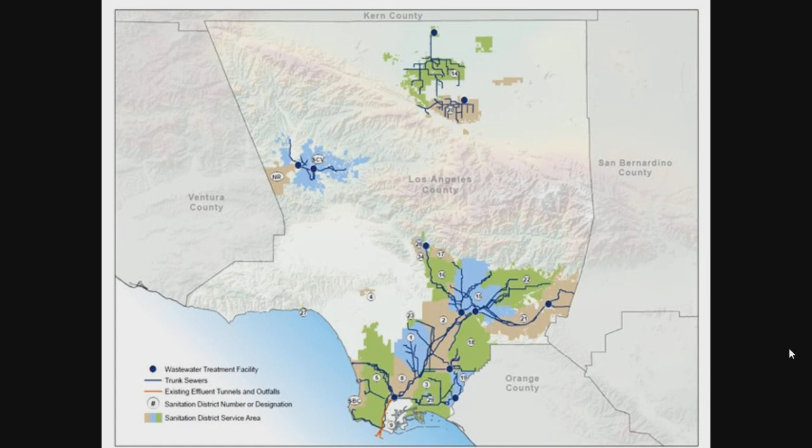The sanitation districts are 24 independent special districts serving about 5.6 million people, covering approximately 850 square miles, made up of 78 cities and unincorporated areas of Los Angeles County. The sanitation districts construct, operate, and maintain wastewater treatment facilities, operate and maintain collection systems, and are responsible for disposal and transfer of collected solid waste. An integral part of our mission is to convert wastes into resources. To this end, we recover recyclable materials, including recycled water, and produce green energy.

Now for the star of the show, let me introduce you to Tulare Lake Compost, or TLC, the sanitation district's only fully owned and operated biosolids management solution. TLC is located in the Central Valley of California, about 200 miles northwest of Los Angeles. It took over 10 years to permit, design, and construct. The facility is designed to be constructed in phases, utilizing state-of-the-art technology. Permitted at full capacity for 500,000 wet tons per year of biosolids, it is currently built to a capacity of 100,000 wet tons per year. And it has been in operation since January of 2016.

In this presentation, we will discuss the unique opportunity and vision at TLC, as well as the challenges and research efforts that have brought the facility to where it is today, and how we developed a system that meets our throughput goals and compliance with environmental regulations.

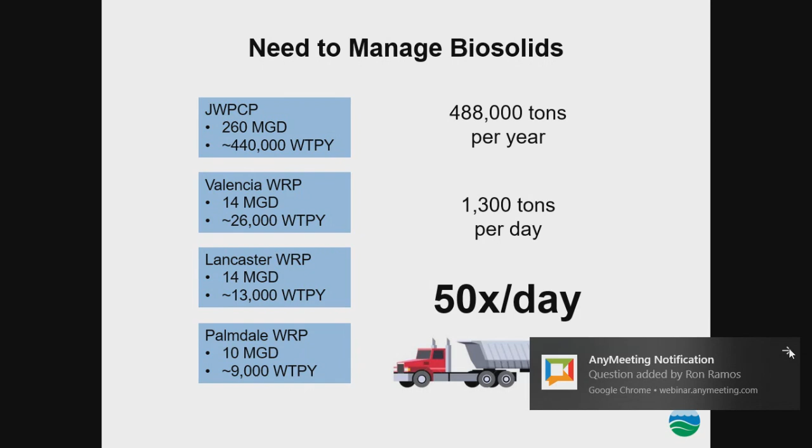As I'm sure most of you are aware, one of the byproducts of wastewater management is biosolids, which happens to be the most difficult to deal with. 4 of the sanitation district's wastewater facilities produce biosolids: the Joint Water Pollution Control Plant, or Joint Plant, and the Valencia, Lancaster, and Palmdale water reclamation plants, in total producing approximately 488,000 wet tons per year of biosolids. This represents over 1,300 tons per day, over 50 trucks per day, every day, and this material has to go somewhere. In the 1990s, the sanitation district's biosolids management consisted of composting and landfilling.

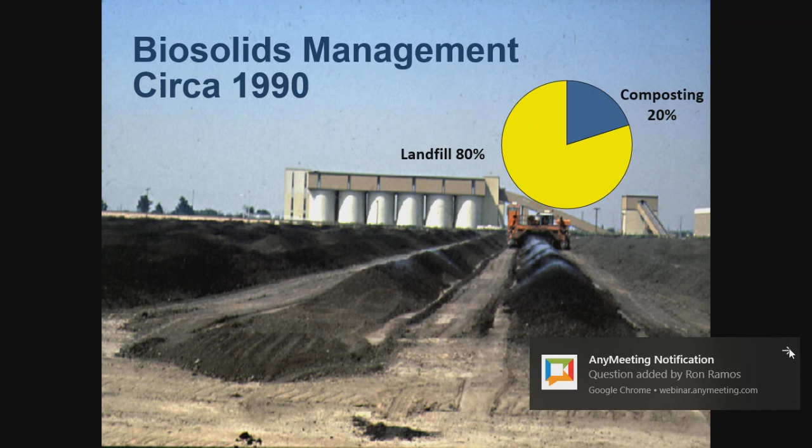20% of the joint plant's production was composted on site. The remaining 80% was landfilled. That landfill was the Puente Hills landfill, also owned and operated by the sanitation districts. Unfortunately, odors from on-site composting eventually led the districts to cease these operations. In the early 2000s, biosolids management options started to dwindle. Due to the closure of the Puente Hills landfill, the end of the on-site composting operations at the joint plant, and land application bans throughout the state.

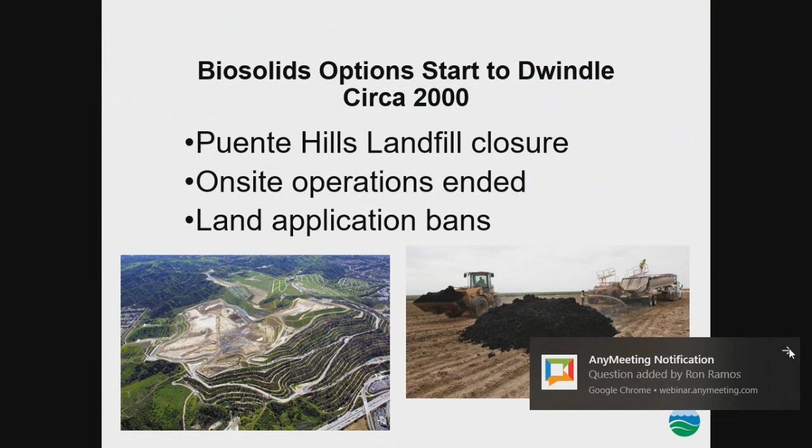The districts needed a solution. The solution had to be reliable. While the districts continue to utilize a number of third-party biosolids management options, to increase reliability we wanted an option that was fully owned and operated by the districts, sized to handle the district's full biosolids production, and environmentally responsible to turn this waste into a valuable resource.

When considering locations for composting, California's Central Valley seemed to be a very good fit. There was lots of available land, and it's one of the largest agricultural regions in the country. There was an abundance of wood waste and a huge demand for fertilizers and soil amendments.

Bear with me. There we go.

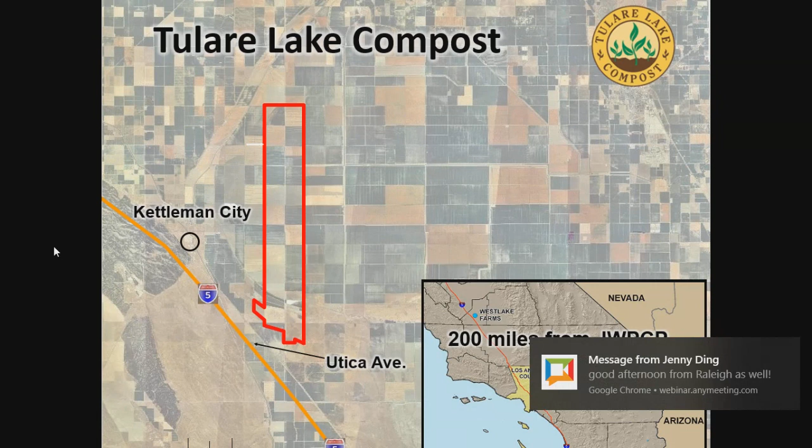In 2001, the districts entered into an agreement to purchase 14,500 acres from Kings County landowner Westlake Farms Incorporated. A small portion of the property was set aside to develop a state-of-the-art composting facility. Compost produced by this facility would be used on the remaining agricultural land by the former owner, now tenant, through a lease agreement. The remaining adjacent land is sufficient to handle all compost produced by the facility at full permitted capacity. So here's the vision for TLC.

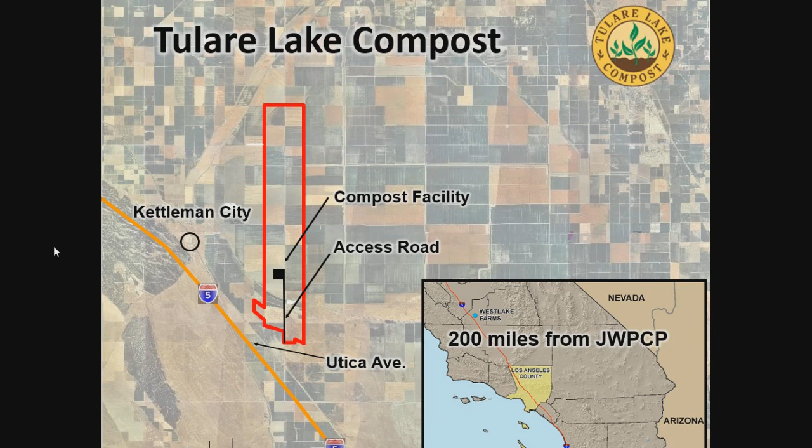Take the highly treated biosolids from the joint plant, blend with the abundant local agricultural wastes, and produce EPA Class A EQ compost to be applied directly to the land owned by the districts.

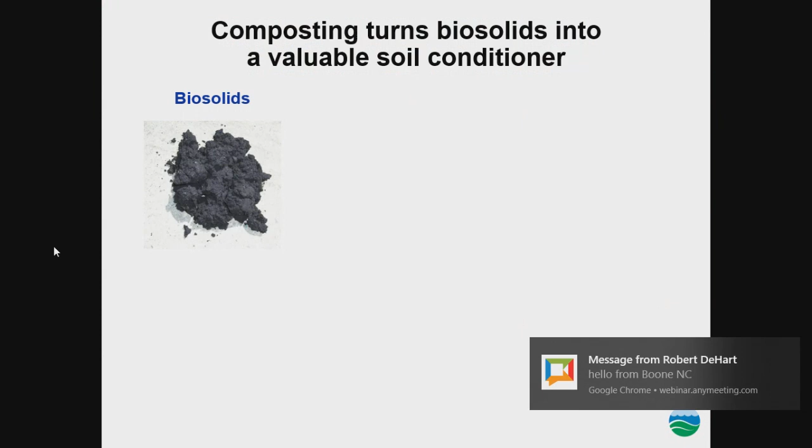So what is this Class A EQ compost? Biosolids coming off the wastewater treatment process are stabilized and reduced in volume through digestion, then dried to about 29% solids.

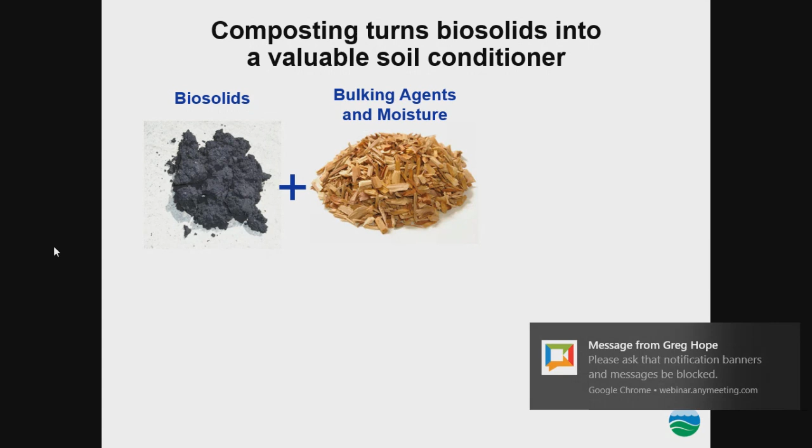These biosolids are mixed with green waste or agricultural wood waste containing the necessary carbon and water. Under aerobic conditions, microorganisms break down this organic matter and give off heat. Heat action over time destroys pathogens, producing compost.

More wastewater agencies are turning to composting as a means of biosolids management. It's environmentally friendly since it improves soil health, increases crop yield, reduces irrigation needs by reducing evaporation, and reduces dependency on chemical fertilizers. In addition, it mitigates climate change due to carbon sequestration by actually putting carbon back into the earth. It also contributes to the state of California's goal of organics diversion from landfills.

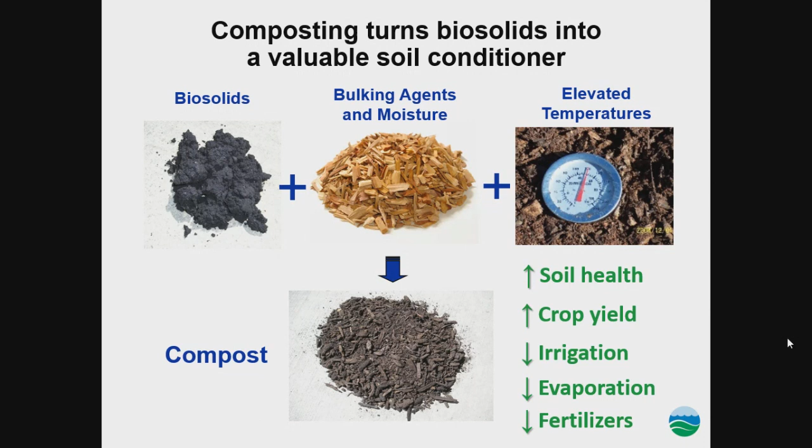The EPA defines Class A EQ compost as follows: biosolids that have been treated beyond what normally occurs at the treatment plant level, including two numeric criteria. The biosolids must have been treated by a process to further reduce pathogens, or PFRP. The purpose of this criteria is to ensure that pathogens such as bacteria and virus are killed off to make the material safe to handle. To meet the PFRP criteria, the compost has to be kept at a temperature of at least 131 degrees Fahrenheit for at least 3 days to ensure the heat kills off the pathogens.

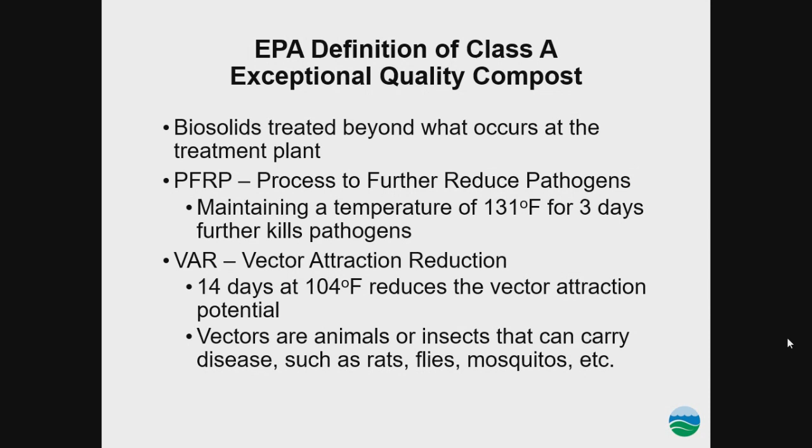The biosolids also have to be treated by a process to ensure vector attraction reduction, or VAR. The purpose of this process is to reduce the attraction to the compost by animals or insects that can carry disease, such as rats, flies, and mosquitoes. To meet the VAR criteria, the compost has to be maintained at a temperature of at least 104 degrees Fahrenheit for at least 14 days.

While we encountered a number of challenges in bringing TLC online, the biggest has been related to air emissions. So at this time, Brian Polson is going to give us some insight to the air quality challenges at TLC.

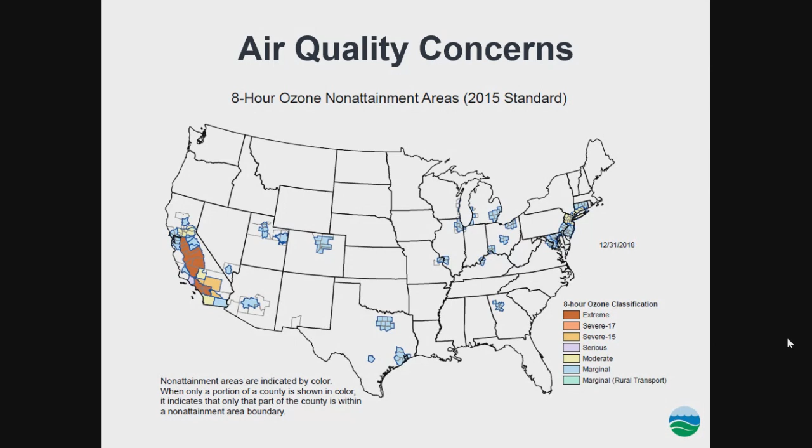Thank you, Carl. So I'll start off by providing a short background on air quality and why it's a challenge to TLC. This map shows the areas with the worst air pollution in the country. The two areas which are classified as extreme non-attainment zones for ozone are colored in red and are both located in California. And TLC is right in the middle of one of them.

What this means is that the local air district has to closely regulate emissions, which results in hundreds of regulations that we have to follow. And this relates to composting because composting generates emissions.

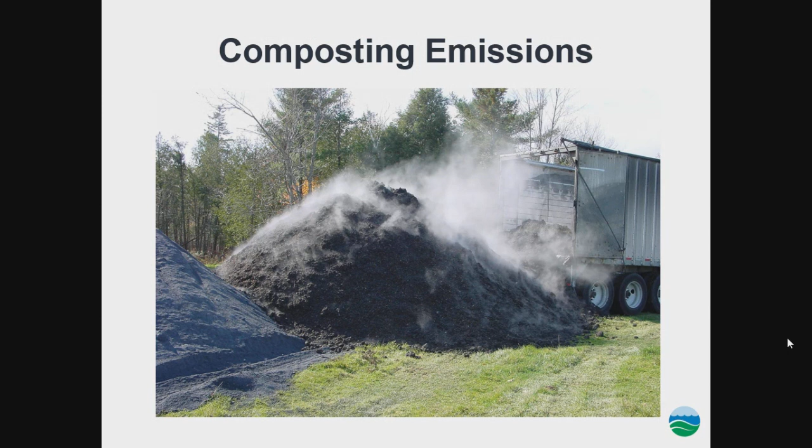This is a picture of an uncovered and active composting pile, and you can see the steam coming off the top, which brings along pollutants with it. The two main emission compounds that we'll be talking about in this presentation are volatile organic compounds, otherwise known as VOCs, and ammonia emissions, which are both generated from the composting process.

Now, because the facility is in a non-attainment zone, the local air district, which is the San Joaquin Valley Air Pollution Control District, has to establish a limit on how much emissions we can generate per year. And this ultimately determines the amount of biosolids that facility can process. Before I go into how we are maintaining compliance, we need to take a look at the composting process.

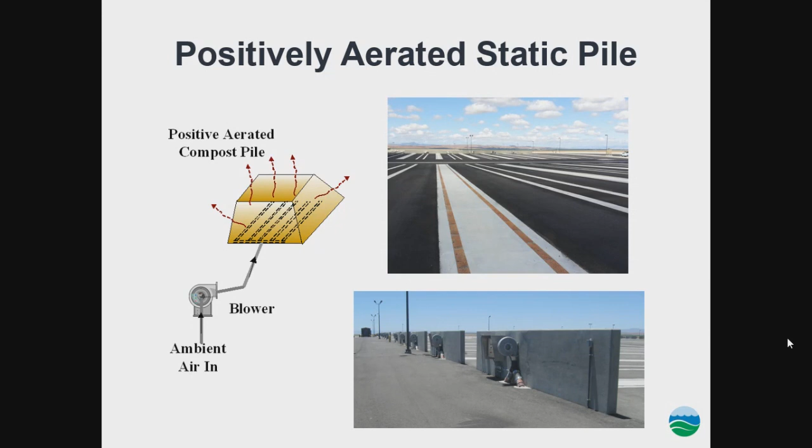Composting is an aerobic activity. At TLC, we operate positively aerated static piles. Once the biosolids are mixed with agricultural waste, the material is placed on top of underground aeration headers, which are connected to blowers. These blowers draw in ambient air and push it through the compost pile to provide the compost with oxygen.

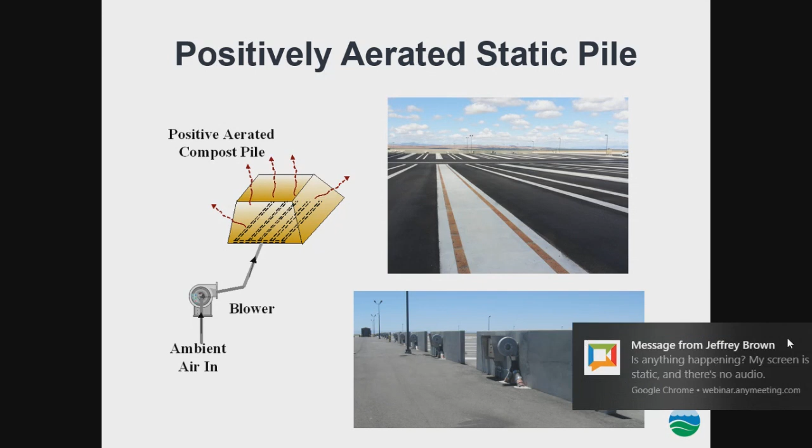Now, emissions from within the pile would be pushed out through the surface, so we need a method on how to capture and reduce these emissions before they reach the atmosphere. The way we achieve this is using the synthetic fabric cover system, which is the technology used at TLC today. These covers are made of the same material as the thermal jackets you can find at outdoor equipment stores, and they work in the same fashion.

This system uses the fabric covers which are laid over the windrow compost pile being constructed. The fabric is breathable and provides moisture retention, but it prevents outside water from coming in. It also acts as a thermal insulator to maintain heat within the pile to keep the material composting. Now, these covers actually control emissions.

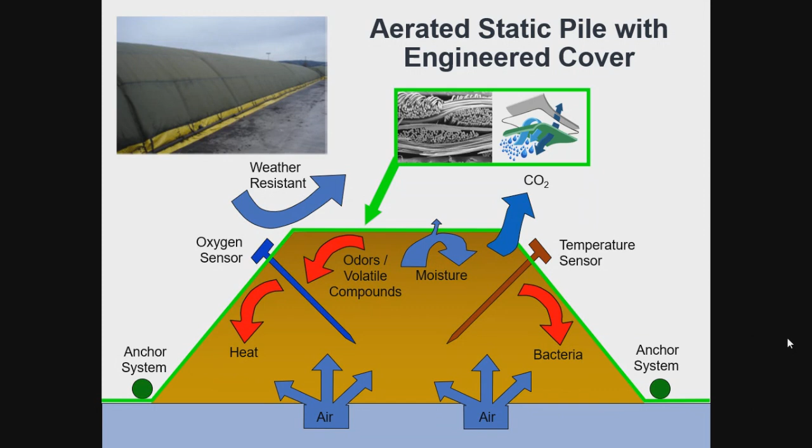This diagram shows a cross-section of a covered windrow pile and what's happening underneath. As the steam from the compost mix rises up and hits the cover, it condenses and forms a moist biofilm layer on the underside, and this is the main control device. So as VOC and ammonia try to escape through the cover, the biofilm layer captures them and returns them back into the compost pile to be further degraded.

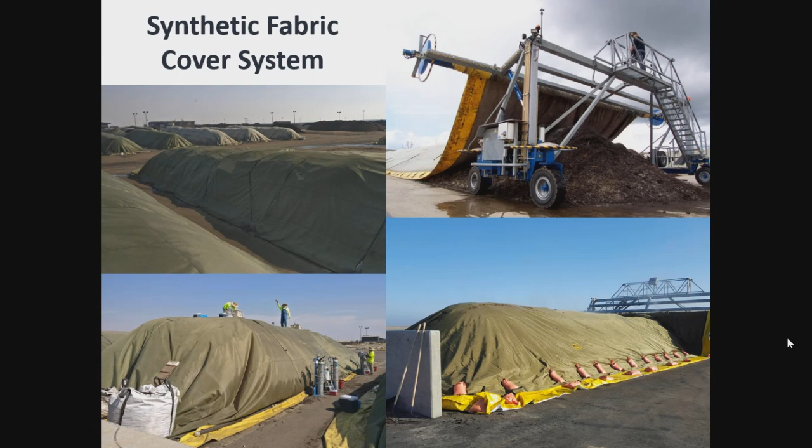The system is also a three-phase composting process, which calls for turning up the piles in between phases. This involves removing the covers, moving their material around to fluff it up, and covering the pile back up again.

Now, during the facility design, we wanted to ensure that the fabric covered technology would actually perform in controlling emissions. So back in 2007, we conducted a pilot study at the Cedar Grove composting facility located in Seattle, Washington, which was already using the fabric covers.

We trucked over biosolids from the joint plant and agricultural waste from the Central Valley to construct test piles, and we sampled the emissions coming off at the top of the cover surfaces. We did tests for both VOCs and ammonia emissions, but I'll mainly focus on VOCs for this portion, since these are the emissions that are the limiting factor for throughput.

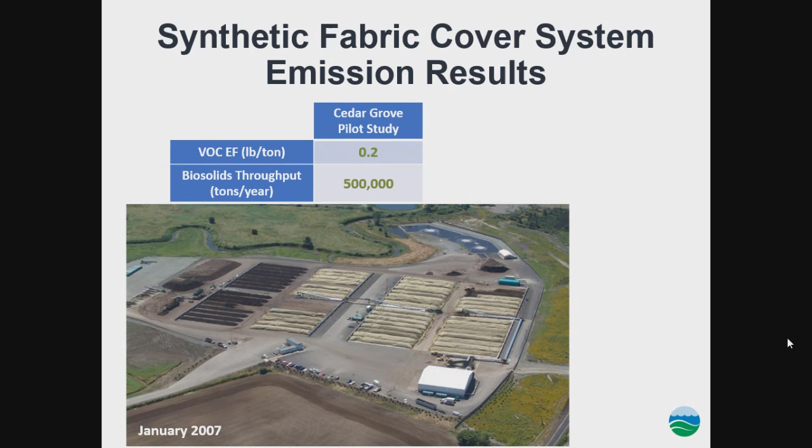From the pilot study, we obtained a VOC emission factor of 0.2 pounds per ton of compost mix. And with our facility's emissions cap, this provided us a biosolids throughput of 500,000 tons per year. This throughput level is important because it allows us to process all the biosolids produced by our wastewater plants that Carl mentioned beforehand. Now we move into 2016, which is when the facility began operation.

As part of our permit requirements, we needed to conduct a compliance test to determine what emission factor we would achieve at TLC. That number came out to 2.6 pounds per ton, which significantly lowered our throughput to 39,000 tons per year. This caught us by surprise as the number is more than 10 times higher than what we observed in the pilot study.

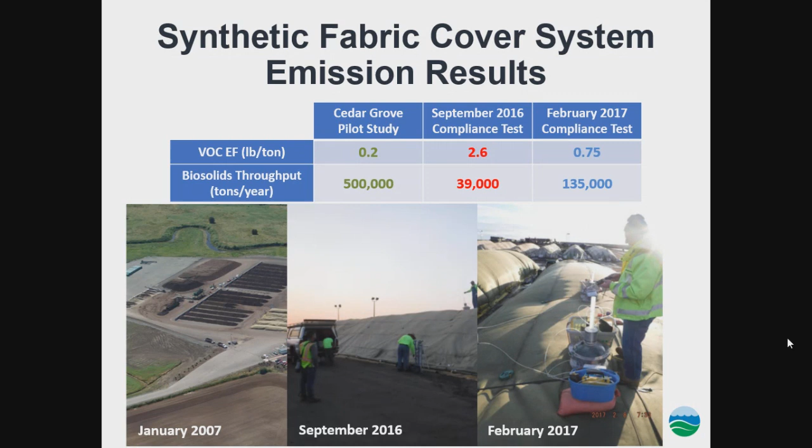To verify if these results would be consistent, we had another test performed as soon as we could in February of 2017. During this compliance test, we achieved a lower VOC emission factor of 0.75 pounds per ton, with a throughput of 135,000 tons per year. But this is still a far cry from what we've seen before in the pilot work. So what caused the difference between the results we saw at Cedar Grove and what we were achieving at TLC?

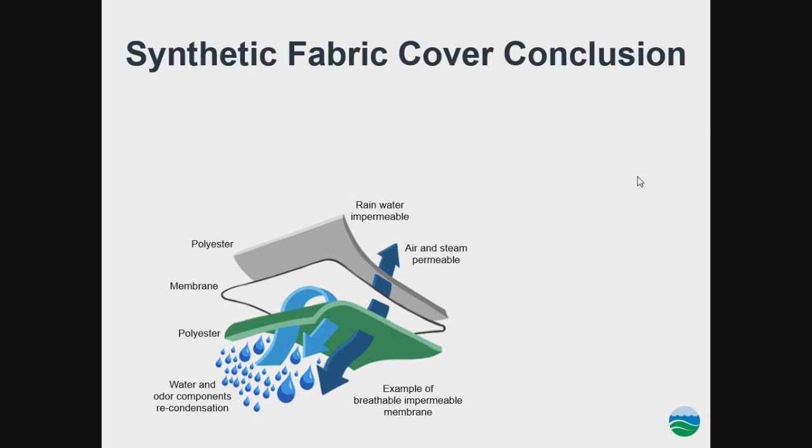Another look at how the fabric covers control emissions. The covers rely on that moist biofilm layer developing underneath the cover. However, the Central Valley experiences high temperatures during the summertime, where it will frequently reach above 110 degrees Fahrenheit. And when this happens, the surface of the covers can easily hit 140 degrees.

What we've seen is that when the moisture inside hits the covers, it'll flash right through and won't condense. This means that the control layer doesn't form, and some of the emissions are allowed to pass through the cover.

This helps explain why the Cedar Grove pilot study had much lower emissions, since it was done in the dead of winter, where they had trouble even getting solids out of the truck because they were frozen to the walls. With those cold conditions, the moisture had no trouble condensing on the cover and forming that control layer.

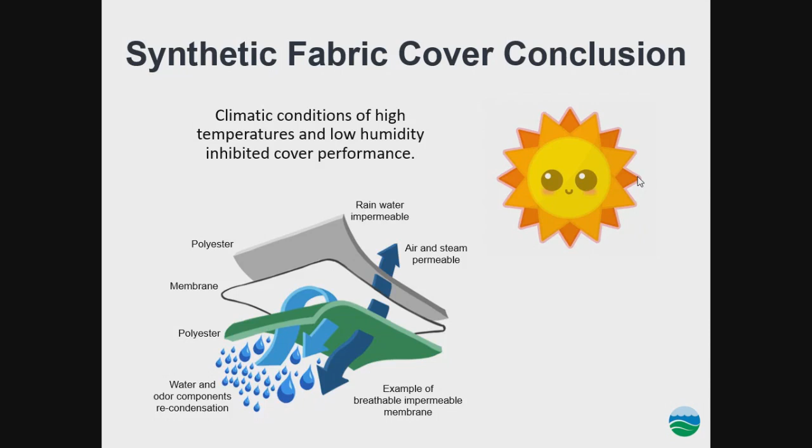Now that we've narrowed down why our emissions at TLC were higher, we need to find a solution to meet our goals of lower emissions and higher throughput. The fabric cover technology didn't provide the emission reductions needed for our facility during the hot, dry summers, so we decided to look at other options.

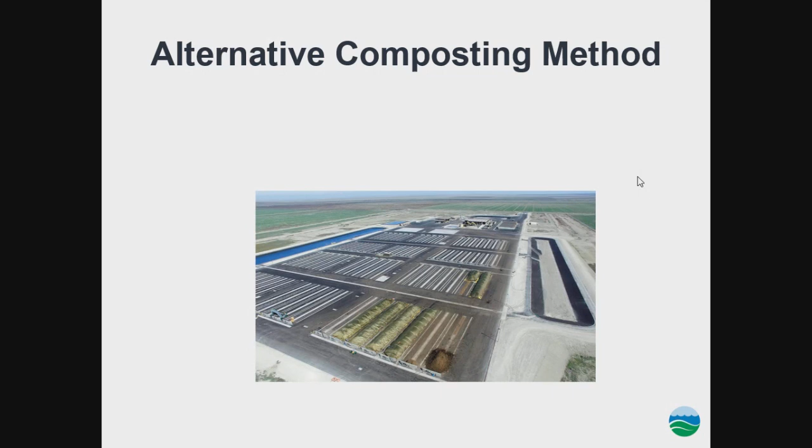Based on our discussion with the testing company, we knew that there were other composting facilities achieving low emissions during the hotter seasons. This eventually led us to an alternative technology: the extended aerated static pile with a finished compost biofilter. We'll refer to it as an eASP for the rest of the presentation.

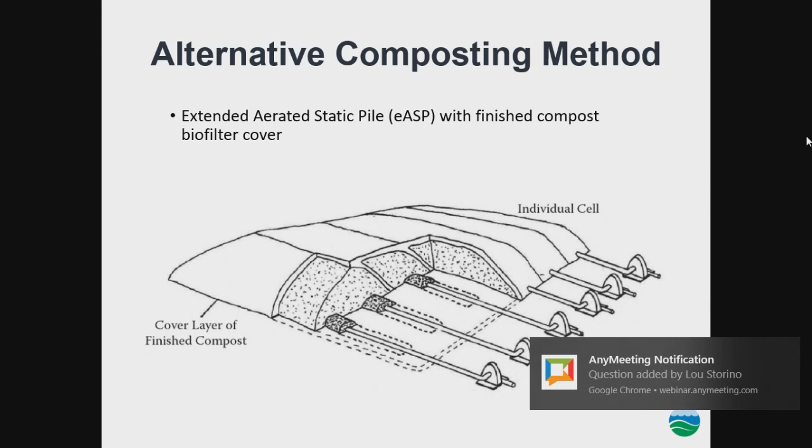It's similar to the fabric cover system where the compost pile is aerated from underneath, and there is a cover on top for emission control. The difference is that instead of a fabric cover, a layer of finished compost is placed on top. This finished compost layer acts as a biofilter, as emissions from the compost rise up through it. The microbes degrade the VOCs and ammonia emissions before they can escape the pile.

The compost piles can be built side by side, and while it's not shown in this picture, there are sprinklers on top of the pile to provide irrigation, to maintain the moist cover and a good environment for the microorganisms.

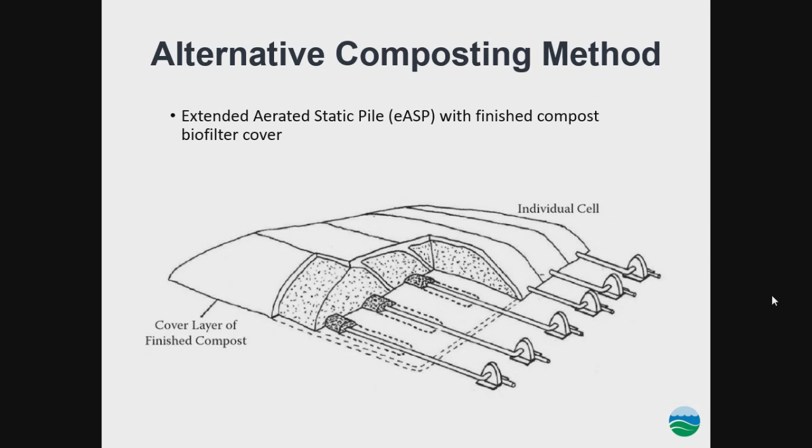Now, these are some of the potential benefits that really pushed us to explore the eASP option further. Based on compliance test data from other facilities using this technology, we saw that they were achieving low VOC and ammonia emissions, and those eASP tests were conducted in the summertime, when we were having the most difficulties.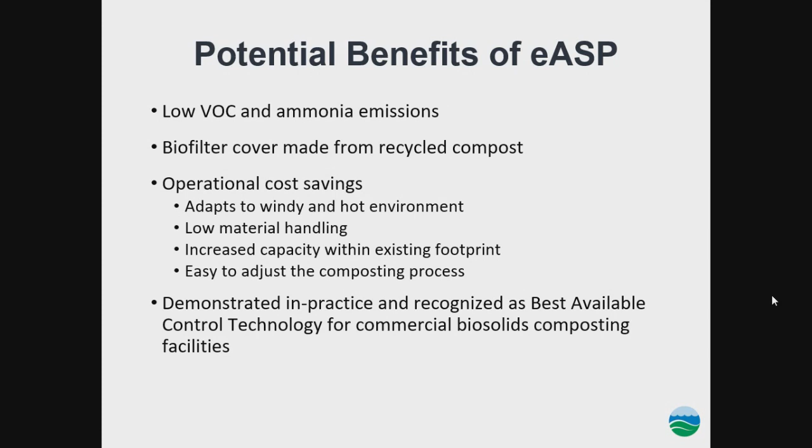However, one of the conditions was that we were required to conduct a compliance test within 9 months after the permit was issued. This is a tall task, especially for something we had never operated before. So I'll pass it back to Carl to explain how our operations team achieved this.

Thank you, Brian. Now I'm going to talk about the actual construction of the EASPs at TLC. TLC is laid out with a series of 12 pads, each with multiple windrows or piles.

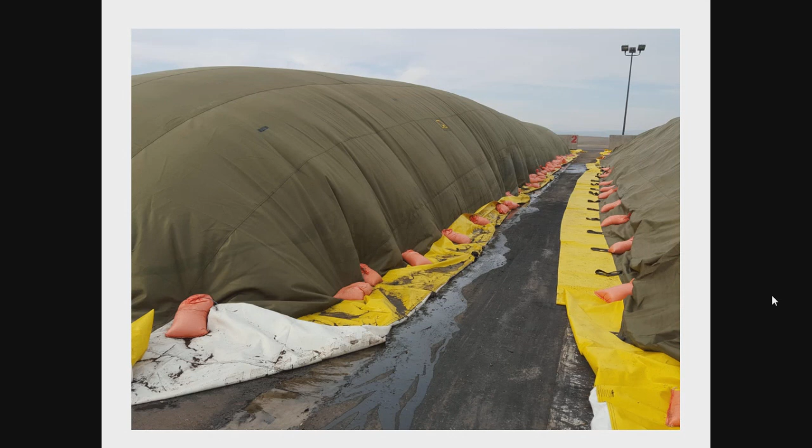Each fabric-covered pile is 26 feet wide by 155 feet long, with an 8-foot aisle between each pile. A typical pad is approximately 155 feet long by 230 feet wide and consists of 7 piles with 7 blowers supplying air to underground aeration trenches.

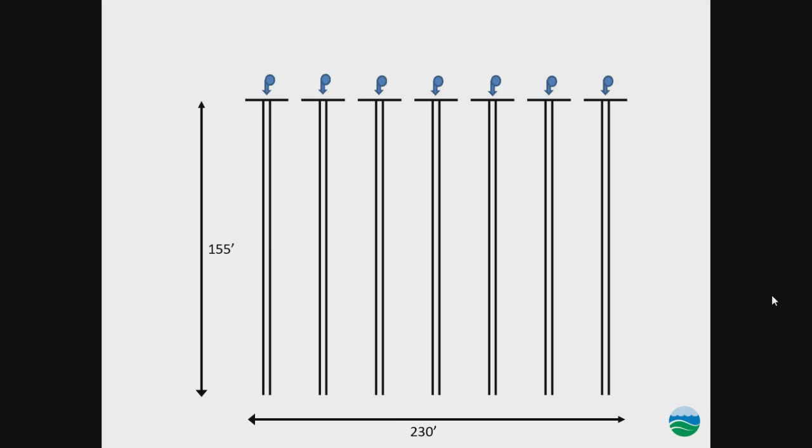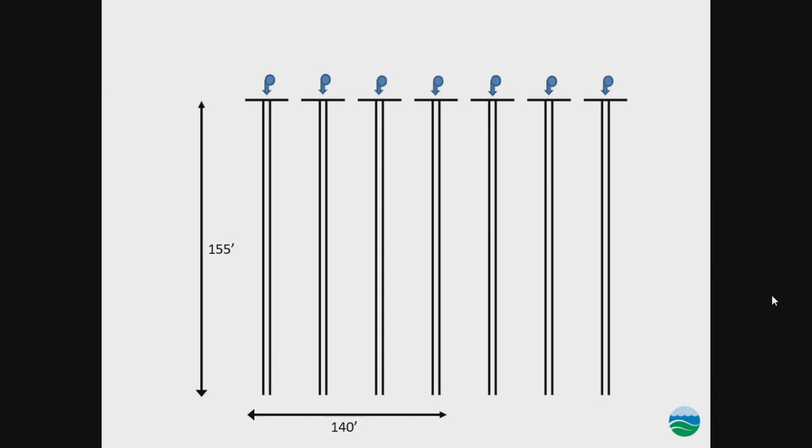The first EASP would be 155 feet long by 140 feet wide, built on the footprint of just 4 piles. We added 3 rows of above-ground perforated PVC piping between these 4 piles.

We rerouted the blower output from 3 adjacent piles to these above-ground headers to provide aeration to the aisles in between. Compost mixture was then placed on the footprint shown here over the course of several days.

This was the maximum size EASP if we were to use both below and above ground aeration. The resulting EASP has 7 distinct zones: 4 piles plus the 3 aisles in between.

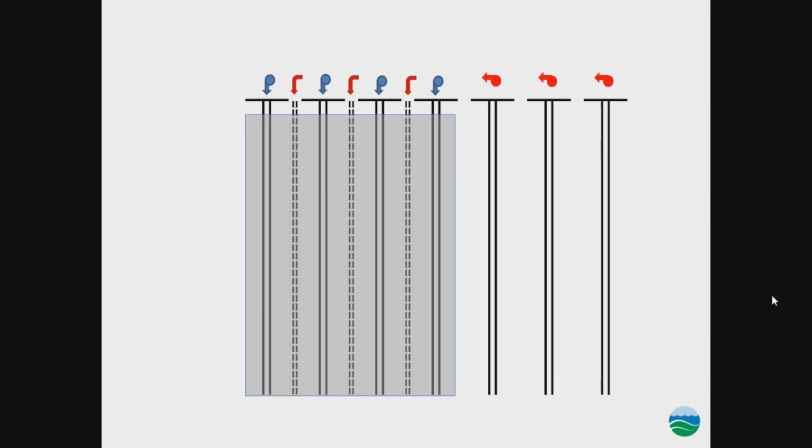A custom-designed PLC monitored temperature and oxygen in 21 locations at 4 depths. The PLC individually controlled aeration using all 7 existing blowers.

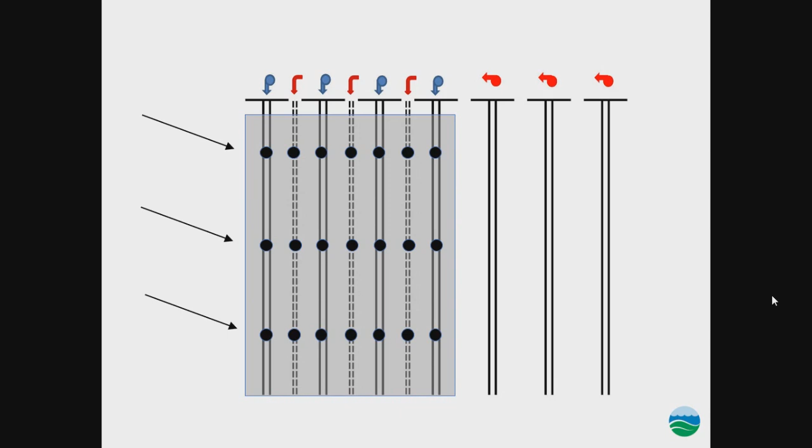The irrigation control system was later upgraded to a cloud-based system, controlled by mobile phone, to facilitate remote and after-hours control of the irrigation system. This flexibility was important so we could react to biofilter temperatures to maintain compliance.

We upgraded the original proprietary wired temperature and oxygen probes to wireless temperature probes, and subsequently eliminated the oxygen probes. The wireless probes communicate directly to the PLC, simplifying data collection and trending.

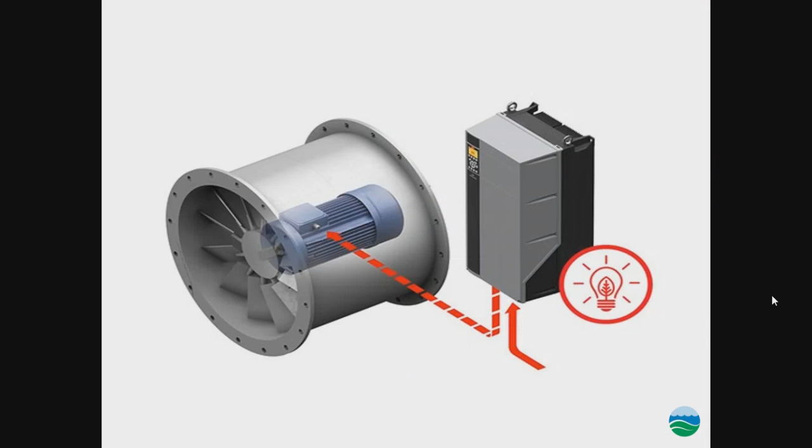We added variable speed drives to each blower to provide the flexibility to adjust the airflow to achieve PFRP, the process to further reduce pathogens faster, and to reduce emissions over the life of the EASP.

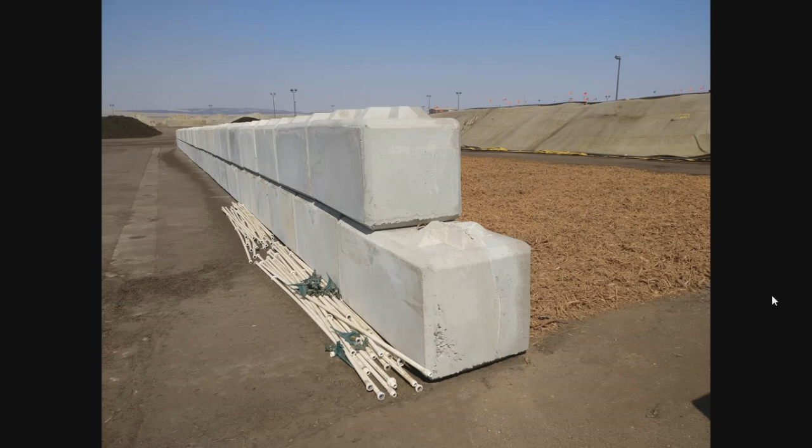Since higher airflow translates to higher mass emissions, it is advantageous to turn the blower speed down as soon as possible. Concrete block walls, similar in style to Legos, were added to the sides of the EASPs to mitigate uncontrolled aeration.

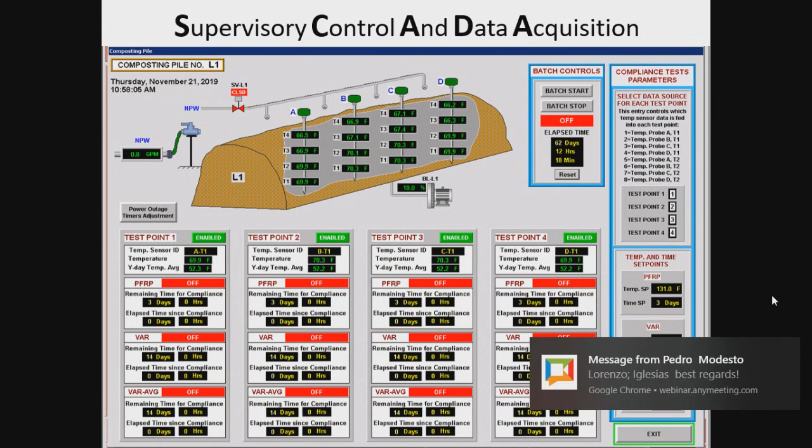Ultimately, the PLC was integrated into the TLC Supervisory Control and Data Acquisition System, or SCADA, which further improved our data monitoring capabilities and standardized the collection and trending of operational parameters.

The SCADA integration was a huge improvement in our ability to see what was going on, even remotely, and react to it in a timely manner.

On the top half of this screenshot, you can see the individual probes of one pile with temperature sensors at multiple depths, the irrigation control valve, and the blower speed control. The lower half of the screenshot shows the status of PFRP and VAR for each monitored point.

The SCADA system monitors each point individually, calculating time to compliance, showing red for points not yet in compliance, and green for points that have achieved compliance.

Over the next several months, we built 11 more EASPs incorporating these improvements, keeping in mind our looming deadline to prove compliance with the air regulations.

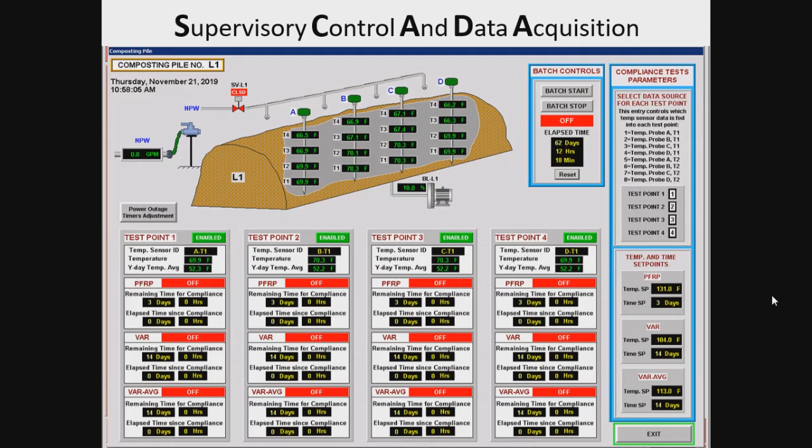At this time, Larry Wong is going to discuss the many phases of research and results and explain how these modifications to the facility will protect our full permitted capacity. Thank you, Carl.

So the research and results presented today are broken up into 3 phases. EASPs 1 through 4 are the early trial and error phase. We had 6 months to get things working before demonstrating that it worked.

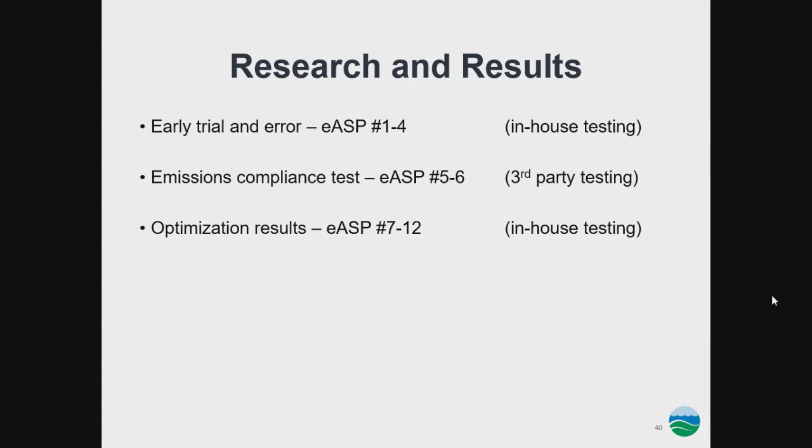EASPs 5 and 6 is the official test to prove air quality compliance to regulators. EASPs 7 through 12 is the optimization of the EASP to adapt this technology to our existing facility infrastructure.

So we'll be focusing on 2 major compliance requirements for the EASP. First comes from our air permit. We're looking at 2 constituents: ammonia and VOCs.

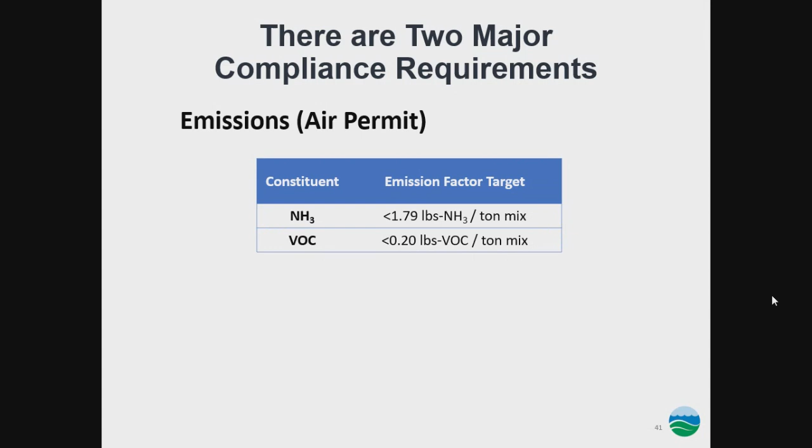Emission factor targets were calculated for both of these to restore the site back to its full permitted capacity. For ammonia, we want to be below 1.79 pounds per ton of compost mix. For VOCs, we want to be below a target of 0.2 pounds per ton of compost mix.

The second compliance requirement comes from the EPA regulations to produce Class A exceptional quality compost. As Carl mentioned earlier, the compost needs to meet certain temperature requirements. For pathogen reduction, PFRP, compost core temperatures need to be above 131 degrees Fahrenheit for 3 days. For vector attraction reduction, compost core temperatures need to be above 104 degrees Fahrenheit for 14 days.

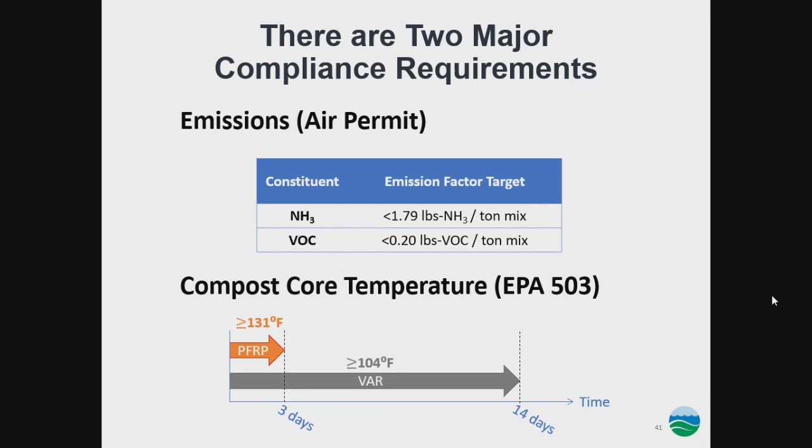Keep in mind, the emission factor is calculated across the entire pile as an average, and the temperature compliance needs to be met at every single monitored point.

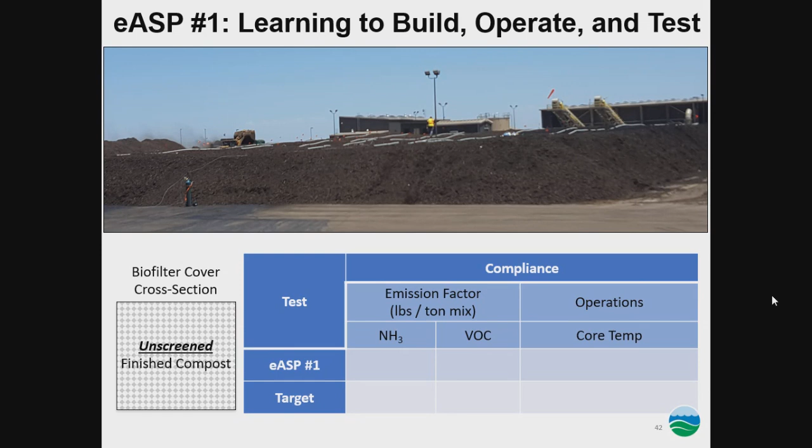So pretty much the idea, we have a large mass of active compost that generates emissions during this composting process. And we're relying on a layer of finished compost on top to treat these emissions. So how did we do? Let me direct your attention to the table on the bottom right.

Emissions: ammonia came in at 0.10 pounds per ton mix. That did very well, so this is well below the 1.79 emissions factor target. Biofilter is amazing at treating ammonia, so I give this a green thumbs up.

VOCs didn't do quite as well. It came at 1.6 pounds per ton of compost mix, well above our 0.20 emissions factor target, so I give that a red thumbs down. Not meeting the emissions factor target doesn't mean it's a failure, it just means our composting throughput capacity hasn't been restored yet.

For operational temperatures, all monitored zones need to pass PFRP for pathogen reduction and VAR to keep vermin and bugs away. 20 out of 21 zones pass. I give this a red thumbs down. Yes, I'm a harsh grader, but it's important to pass at every single monitored point. Otherwise, you must dig out the failed zone and recompost it.

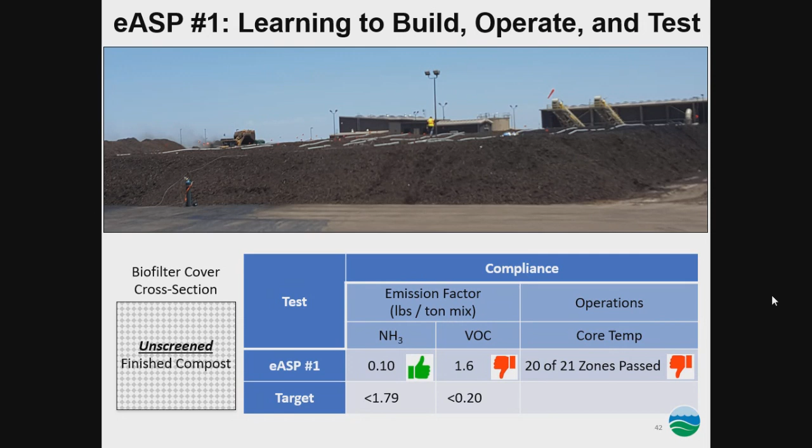So onto our second eASP. We made 4 major improvements. We installed variable speed drives for better air control of the blowers. We implemented push block walls to reduce air intrusion through the sides of the pile. We improved the irrigation coverage of the biofilter cover. And we changed the composition of the biofilter cover.

You see on the bottom left, it's a 1-foot layer of unscreened finished compost on the bottom, topped by 1.5 feet of screened finished compost. The screened finished compost has a smaller particle size. This allows for more contact time with emissions passed through and better moisture retention in the cover. So how did we do?

Emissions did well for both ammonia and VOCs, coming in at 0.04 and 0.05 pounds per ton of mix, respectively. They're both well below their emissions factor target. Give it a green thumbs up. Operationally, core temperatures all passed for pathogen and vector reduction, but one zone was a little slow to pass. Not quite a green thumbs up, so I give a yellow sideways thumb, because there's still room for improvement.

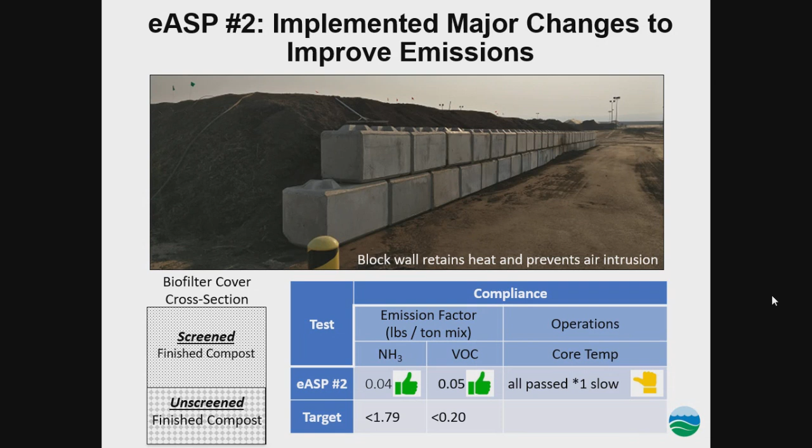So, on to eASPs 3 and 4. We tried adjusting the air to meet temperature compliance quicker. As Carl brought up earlier, composting is a biological process, with biosolids and wood chip bulking agent. Our hypothesis is that by providing more air early, it speeds up the aerobic microorganisms, generating more heat.

So the table on the top right: eASP2 had the blowers turned on after the pile was built, and the blowers were on at 50%. eASPs 3 and 4, the blowers were on during the build and were set at 100%. The graph on the bottom right shows eASPs 2 through 4, the compost core temperatures versus time. eASP2 is shown in the blue line, eASP3 is the orange line, eASP4 is the gray line.

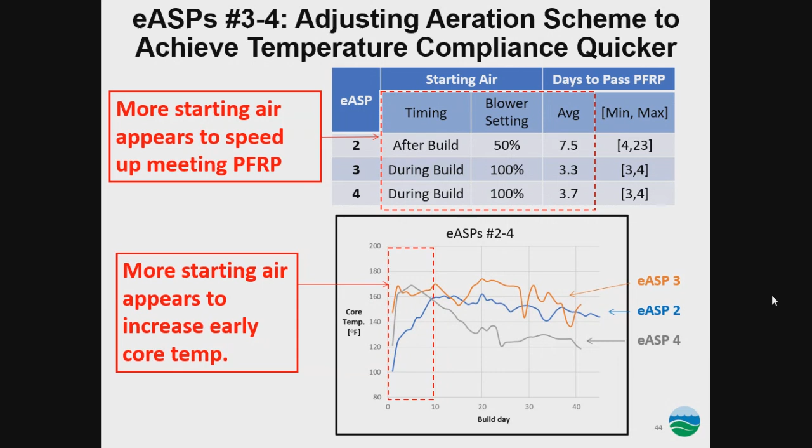As you see in the plot, providing more starting air early leads to an increase in early core temperatures. In the table above, providing more air early in the composting process results in 4 days shaved off the average amount of time to meet PFRP. If you look in the final column, the range between the minimum and maximum values for meeting PFRP is significantly reduced, meaning that there's greater reliability of our eASP process.

Here's a recap of the first 4 eASPs from our early trial and error phase. eASP1 was only good for ammonia emissions. eASP2 was good for both emissions constituents. eASP3 and 4 were good for both emissions and meeting operational temperature requirements. We've proven in-house that this works, and now we must officially prove compliance to the air regulators.

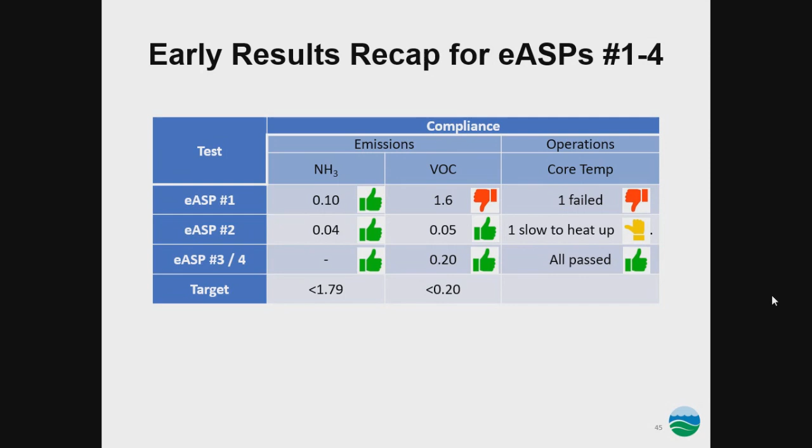In January and February 2019, we had our official compliance test for the regulators. We built 2 smaller 3-row piles, as seen in the top picture. The dimensions of these smaller piles are 150 feet long, 63 feet wide, by 7 feet in height. They have 2.5 feet of biofilter cover on top.

The bottom left picture is of the emissions testing. The bottom right is our results. Emissions: ammonia came in at 0.03, and VOCs came in at 0.12 pounds per ton of compost mix. They're both below our emissions factor targets. These are good, green thumbs up. Operational temperatures all passed for PFRP and VAR, another green thumbs up.

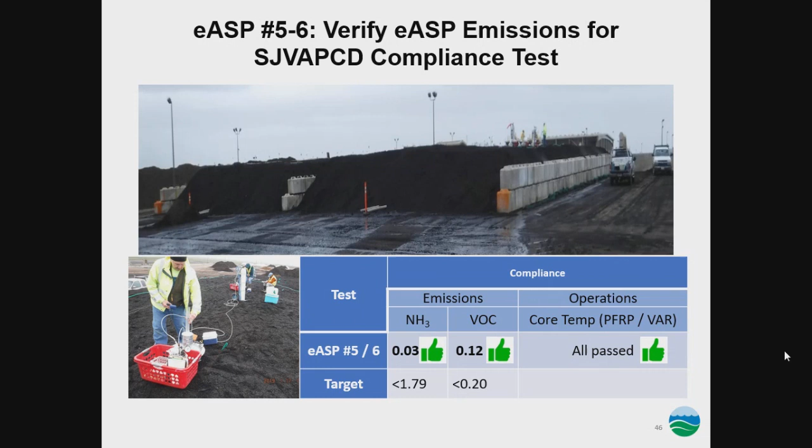So we solved the problem that Brian brought up with our high emissions, and we proved that this technology meets air regulation. But there's still more work to be done to optimize this technology for our facility.

As Carl explained earlier, TLC is designed and constructed for windrow composting. For eASPs 1 through 6, we are rerouting air headers to provide every single row with its own aeration header. The figure on the left shows the existing below ground air headers in green, and the rerouted above ground air headers in purple.

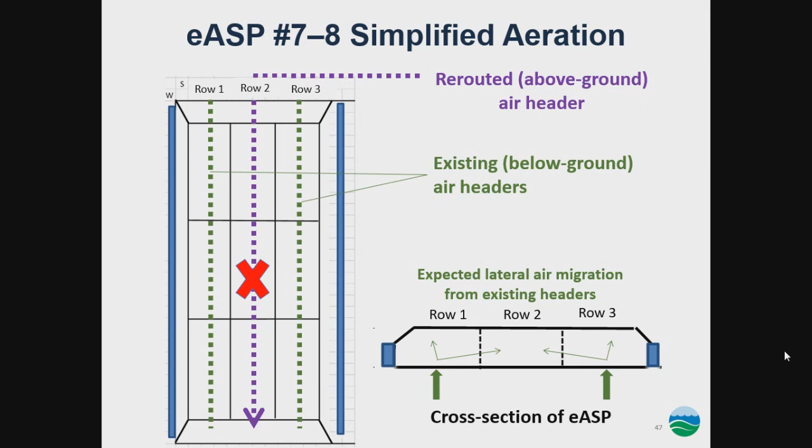For eASP 7 and 8, we wanted to find out: can this technology work using only the existing below ground air headers? If the above ground air headers are not necessary, a significant capital improvement project can be avoided. So for this test, we're getting rid of the middle air header. In the diagram in the bottom right, we're testing the hypothesis that there'll be enough lateral air migration through the middle row of compost.

What was proven in the air regulation compliance test was the 3-row eASP configuration, bookended on either side by block walls. eASP 9 is simulating a full-size eASP that's built over several weeks, and we're implementing it with the simplified aeration scheme from eASP 7 and 8, without the above ground air headers.

On week 1, we bookend one side with the block wall. We build 3 rows and bookend the exposed face with biofilter covered material. On week 2, we build another 2 rows and bookend the exposed face with biofilter covered material once again. Week 3, we build the final 2 rows, and now you're bookended by the block wall.

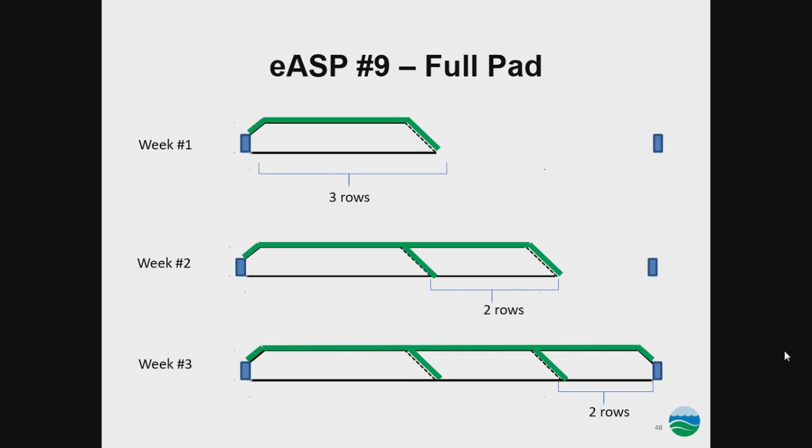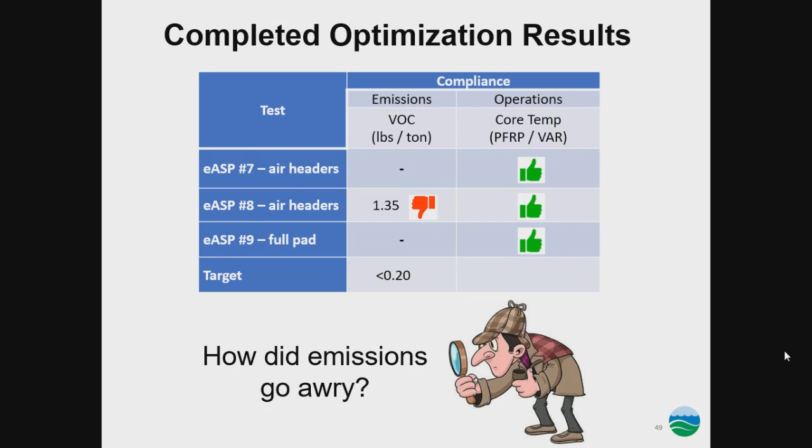Emissions wise, we performed limited emissions testing, and we came back with a surprisingly high result. So how do we end up with higher emissions? We scoured through the test procedures and logs for eASP 7 through 9 and tried to pinpoint what went wrong. We suspected it might have been the biofilter cover. The cover might have been too dry due to power interruptions of the irrigation system. Also, the cover was constructed 6 inches thinner than before.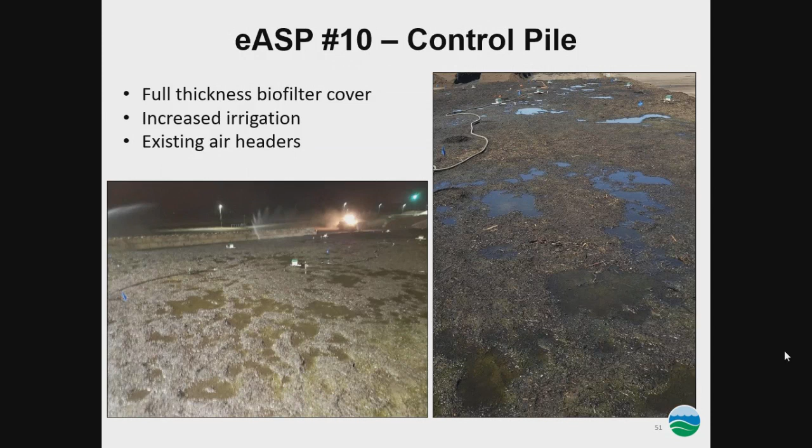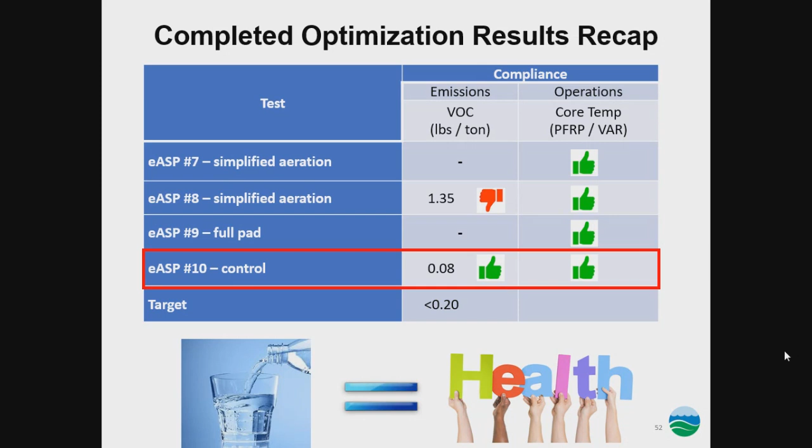So how did we do? Emissions wise, it came at 0.08 pounds of VOC per ton of mix, well below our emission target, and we passed for temperatures as well. So the take-home message is a thick, hydrated biofilter cover is a healthy one.

This brings us to our next hurdle for our facility, as it's not designed to manage the quantity of leachate produced by the eASP process. Keep in mind, our previous testing focused on emissions control, not leachate generation. As I mentioned, the biofilter cover needs to be wetted to maintain its effectiveness. You see in the figure, to provide this moisture, you have irrigation and precipitation. This must be greater than the evaporation.

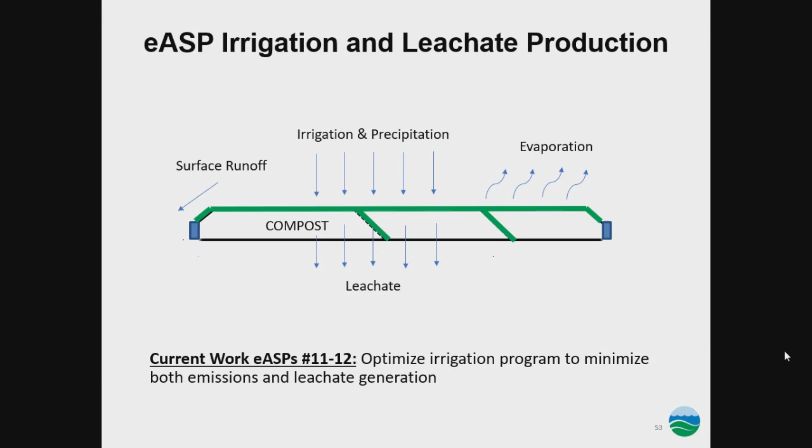But if you apply too much irrigation, this results in leachate. You see in the figure, too much irrigation, you get surface runoff, or you can get leachate that passes through the compost. So for our current work, eASPs 11 and 12, we're trying to optimize irrigation to control both emissions and leachate generation.

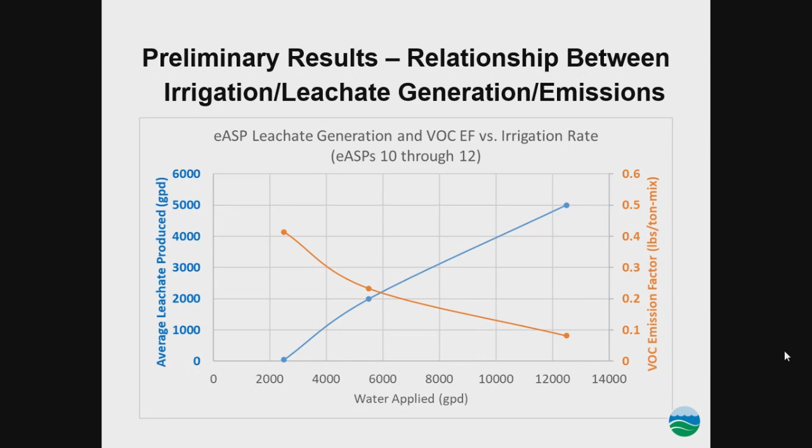Here's a plot with our preliminary results from our decreased irrigation testing. There's a relationship between eASP irrigation, leachate produced, and emissions. The x-axis is the water applied. The y-axis on the left in blue is the leachate production, and on the right in orange is the VOC emission factor. Following the blue line, more leachate is produced as more water is applied, while the orange line shows lower emissions as more water is applied. So this is a very helpful tool for finding a balance between emissions and leachate production.

Just to recap, eASP performs very well for controlling emissions for the facility. It has efficient use of space, can compost twice as much in the same footprint as before. There's a lower labor requirement since it's a single phase composting process, and we're using a green, environmentally friendly, low cost cover material that's plentiful at our facility. We're very happy with the results of this award-winning technology, and we're moving forward with eASP at TLC.